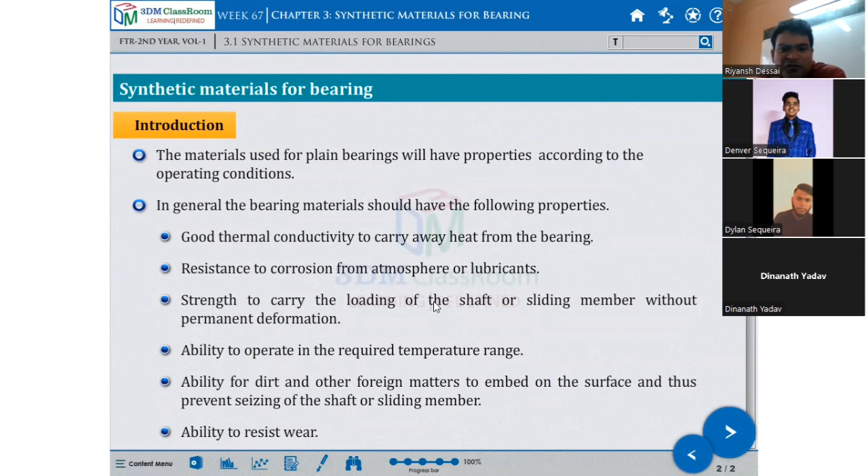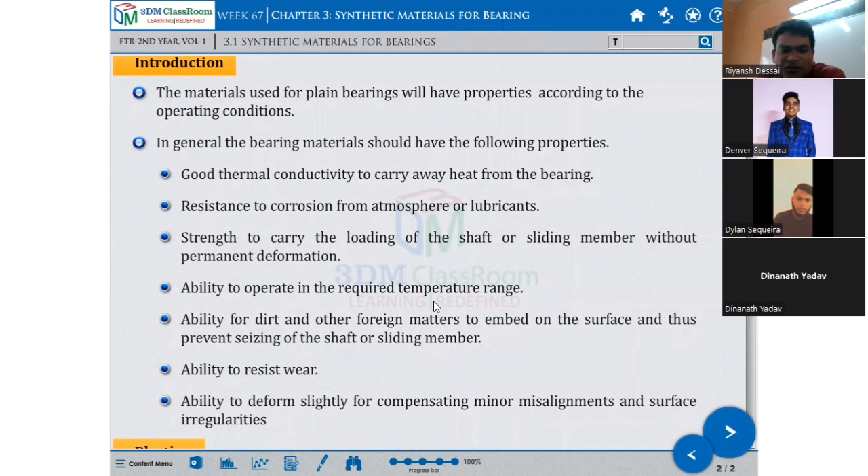Now synthetic material for bearing. Synthetic material for the bearing is mostly proposed according to the operating condition. The general bearing materials should have good thermal conductivity, resistance to corrosion, strength to carry loading, shaft and sliding members without permanent deformation, ability to operate at required temperature, ability for dirt and other foreign matters to embed on the surface and thus prevent seizing of the shaft or sliding member, ability to resist wear, and ability to deform slightly to compensate for minor misalignment of the surface.

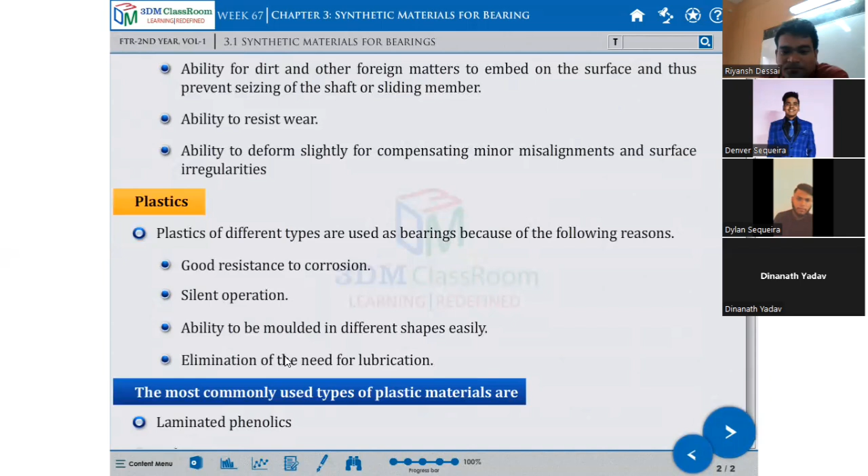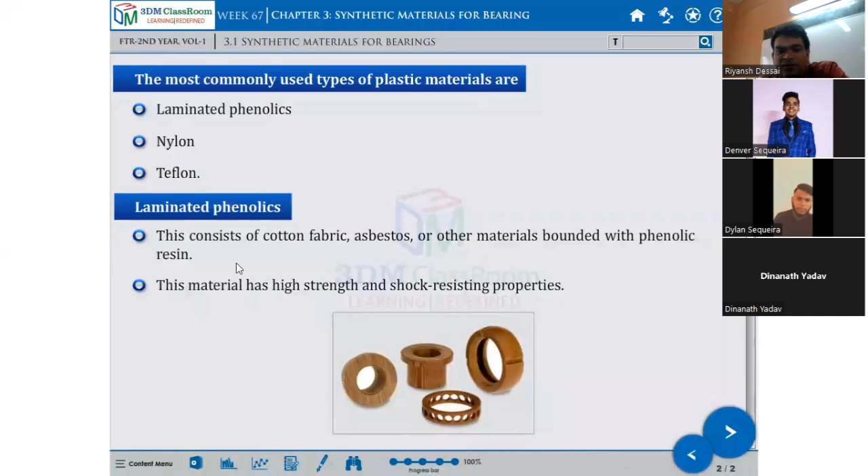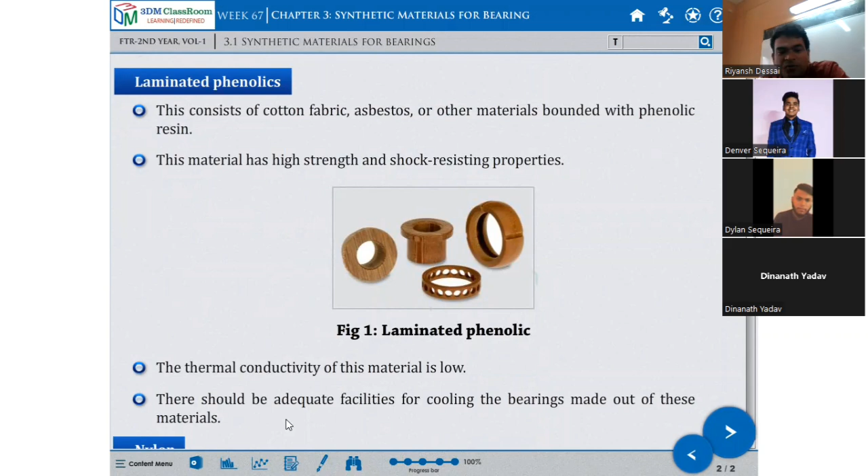Plastic. Plastic has good resistance to corrosion, silent operation, ability to mold it into different shapes, and elimination of the need for lubrication. The most commonly used types of plastic material are laminated phenolics, nylon, and Teflon. Laminated phenolics consist of cotton fabric, asbestos, or other material bonded with phenolic resin. This material has high strength and shock resistance property. Thermal conductivity of this material is low, so there should be an adequate facility for cooling the bearing made out of this metal.

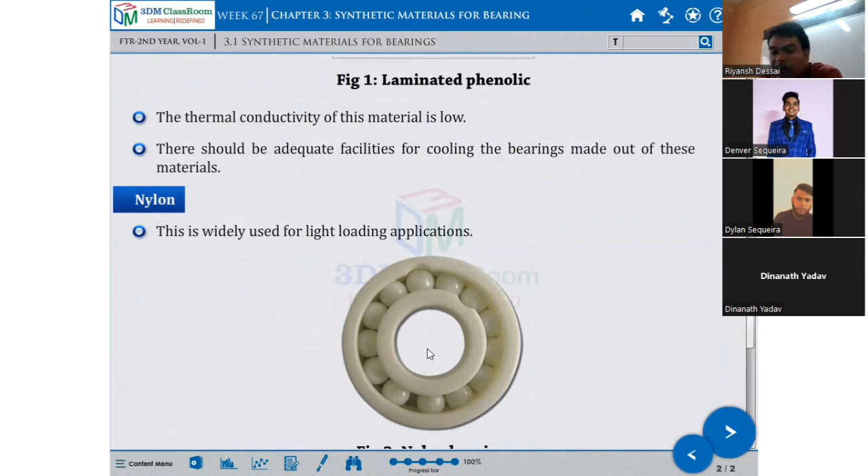Next metal is called nylon. This type of bearing is called nylon bearing. It is widely used for light load applications. Nylon bearings need no lubrication as they have their own self-lubricating property, so nylon bearings do not require any grease.

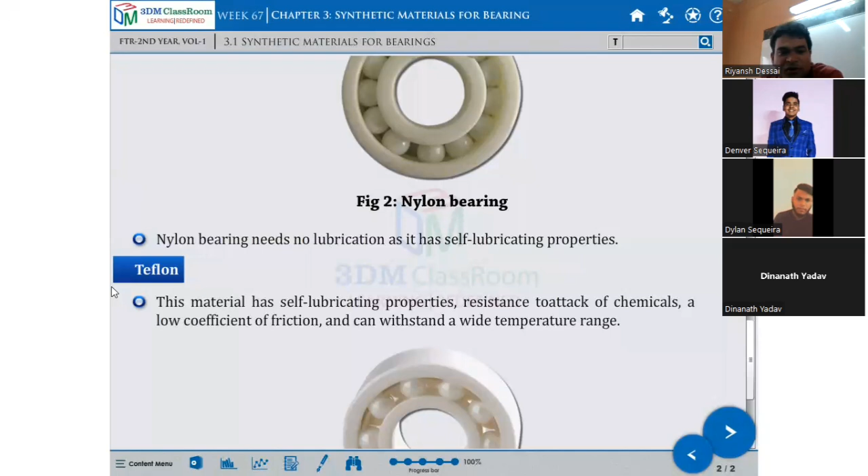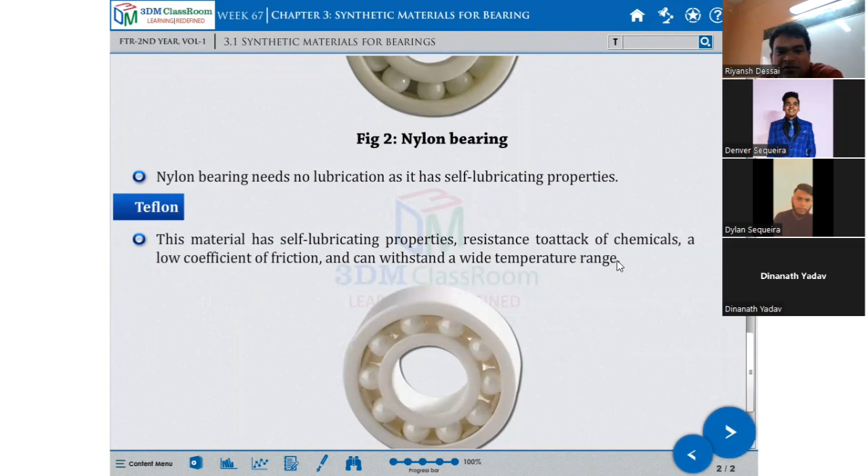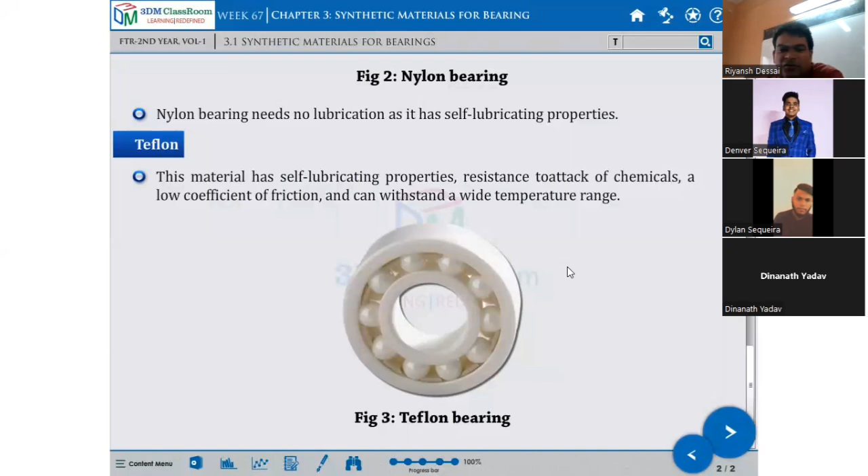Next metal is called Teflon. This is a very costly metal compared to stainless steel. This metal has self-lubricating properties, resistance to attack of chemicals, low coefficient of friction, and can withstand a wide temperature range. Teflon is fire resistant - if you apply it to fire, it will not catch fire. It resists any chemical attack, such as acid; nothing will happen to it, like the Teflon tape we use. Teflon bearings need no lubrication as they have self-lubricating properties.

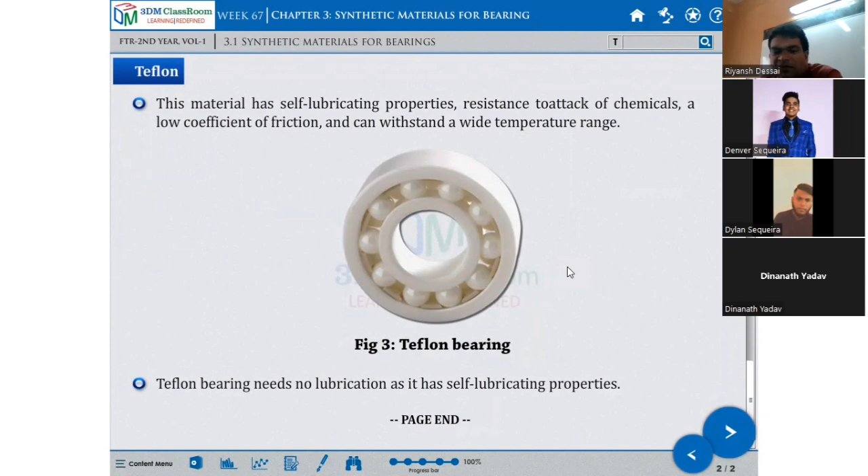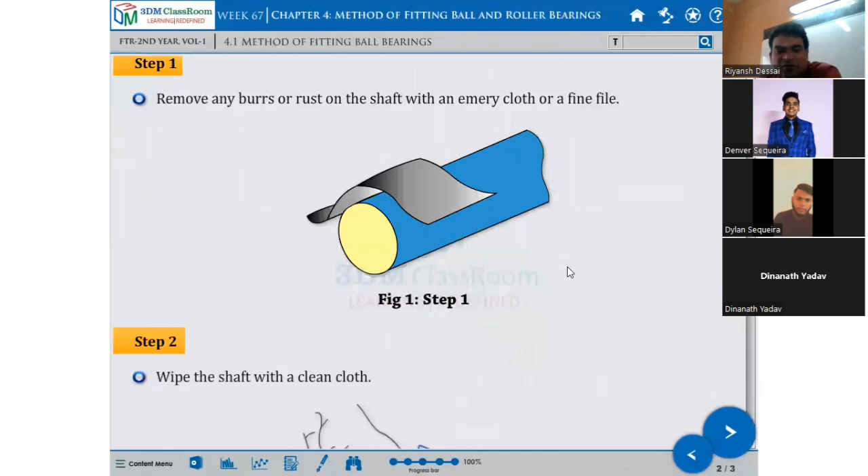Methods of fitting ball bearings - you should read this section yourself for practical purposes, to understand how to remove and how to fix it. There are some steps for how you can remove it. This is a practical matter, but you don't have to write down the full procedure. It is there in your book also for your knowledge, on how you can remove it.

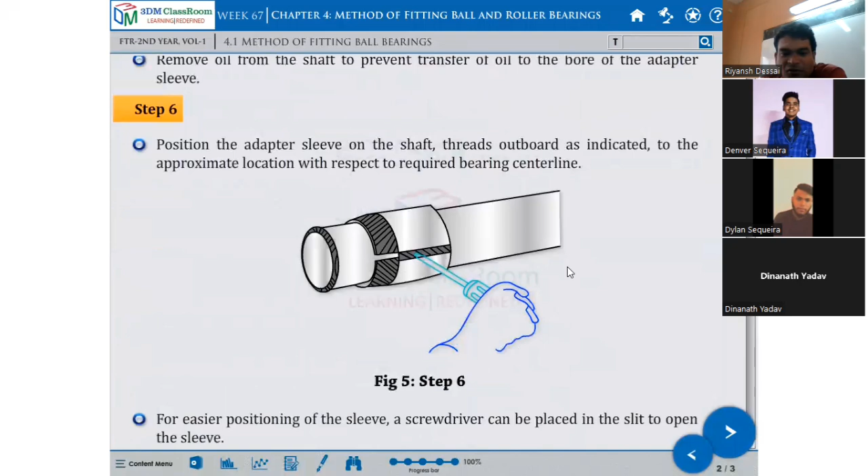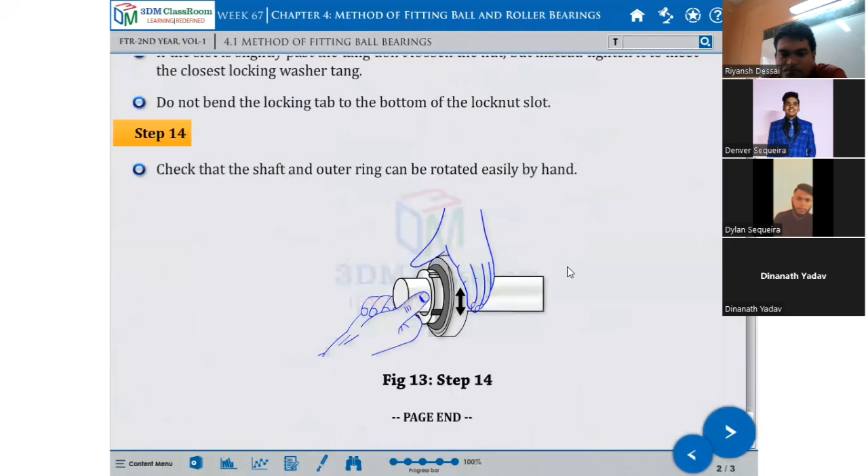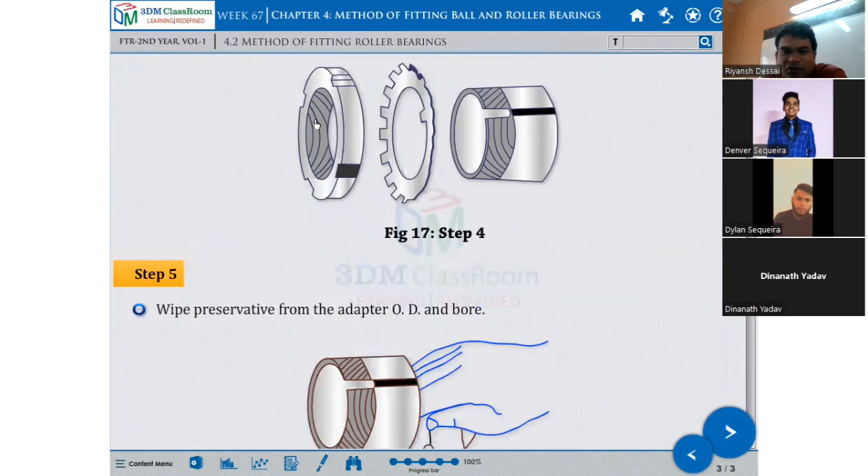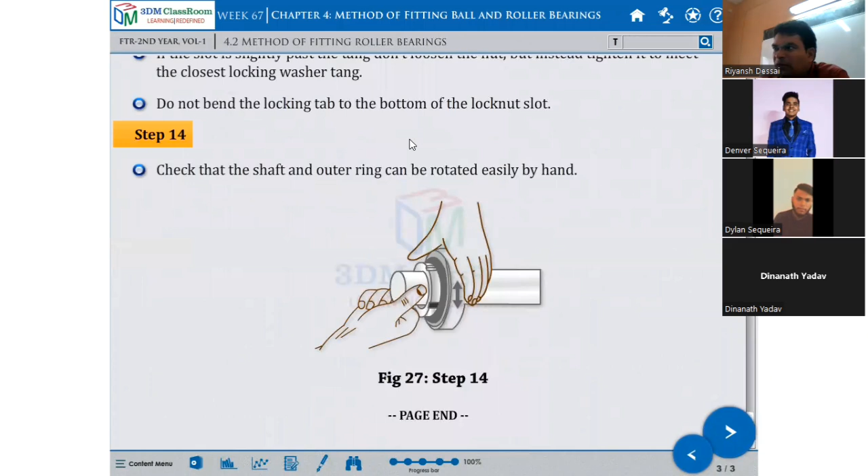Methods of fitting roller bearings. Suppose there is a roller bearing - same procedure, but with a sleeve and locknut involved, how to put this in place; everything is mentioned. Take both of these topics for practical purposes; we'll discuss the job plan and then do the practical.

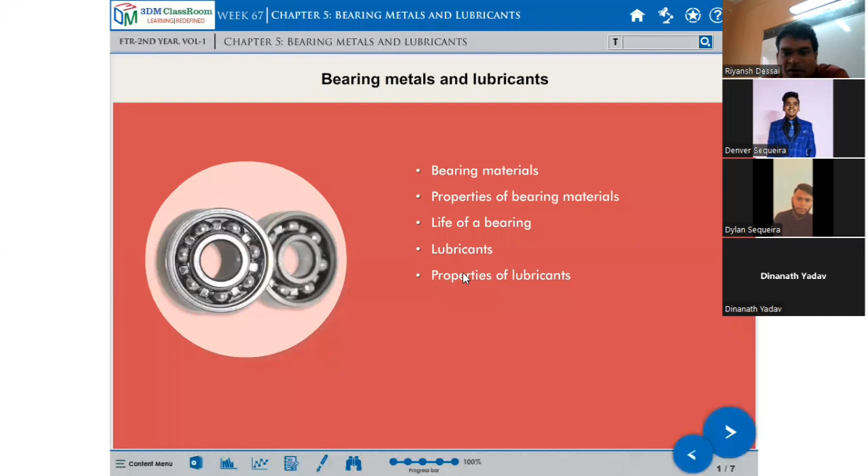Now, bearing metals and lubricants - we discussed this yesterday actually. So we have bearing metal, properties of bearing metal, useful life of bearing, lubricants, and properties of lubricant. This white metal column we already discussed. Bearing metals, for example, white metal.

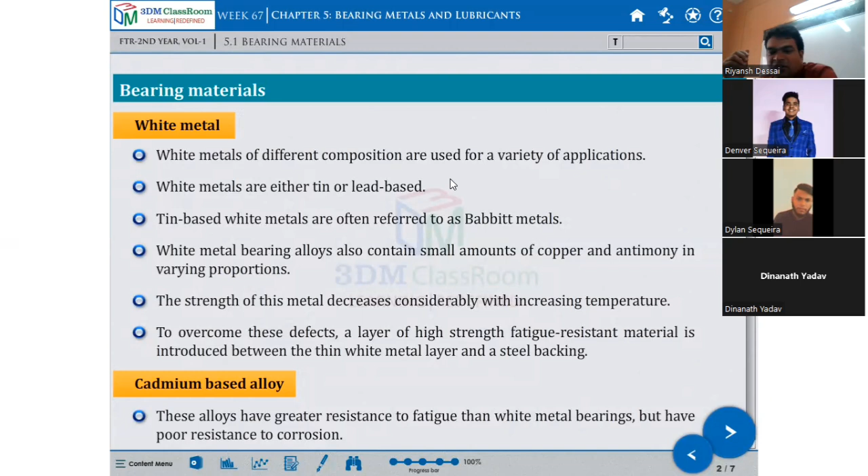White metal of different compositions is used for a variety of applications. White metals are either tin or lead based. Tin-based white metal is often referred to as Babbitt metal. White metal bearing alloys also contain small amounts of copper and antimony in the varying proportion. So Babbitt metal is basically tin based, while white metal basically contains a small amount of copper and antimony. The strength of this metal decreases considerably with increased temperature, and to overcome this defect, a layer of high strength fatigue-resistant material is introduced between the thin white metal layers and the steel backing.

Next is cadmium-based alloy - this was not covered yesterday. These alloys have greater resistance to fatigue compared with white metal bearings, but have poor resistance to corrosion. These alloys usually contain small amounts of nickel, copper, and silver. Bearings made out of these alloys can work at higher temperature and have higher load carrying capacity.

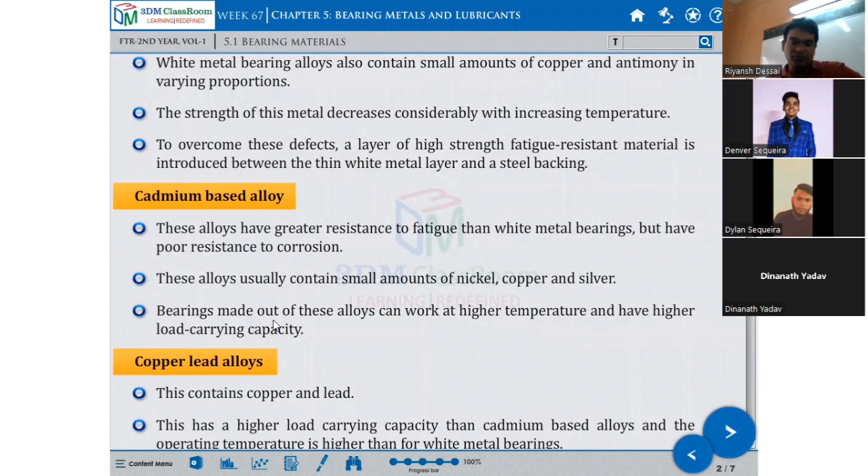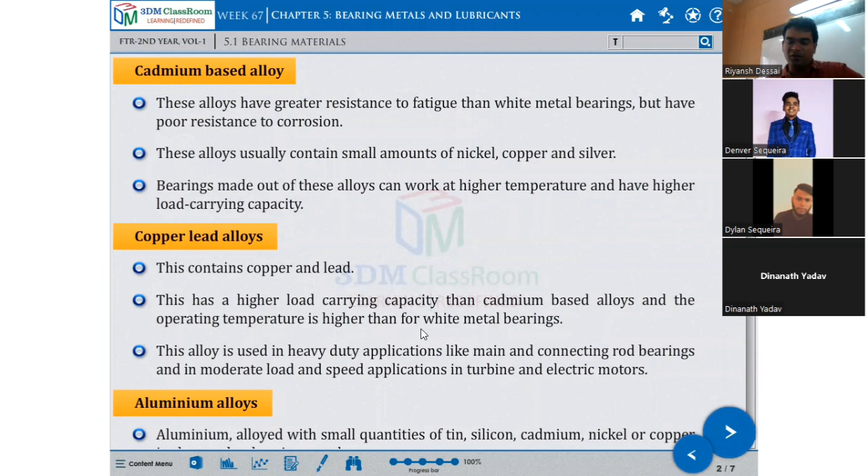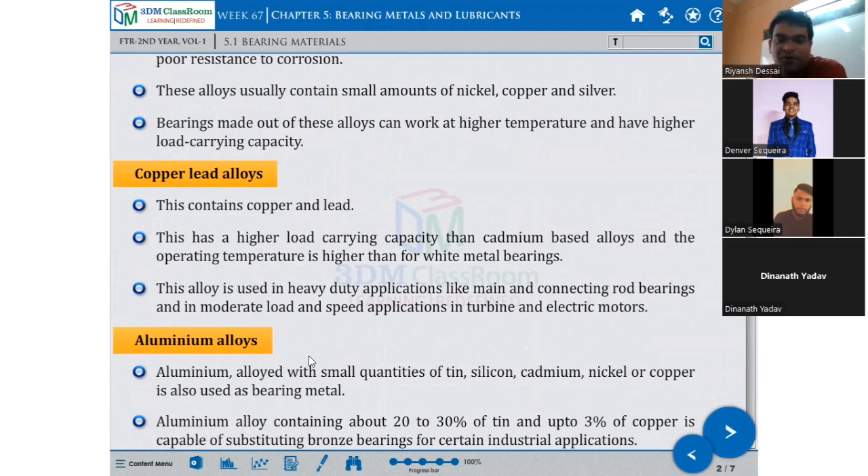Next, copper lead alloys. This contains copper and lead. These have higher load carrying capacity than cadmium based alloy, and the operating temperature is higher than white metal bearings. This alloy is used in heavy duty applications like main and connecting rod bearings, and in moderate load speed applications in turbines and electric motors.

Aluminum alloy may also be used as a bearing metal. Aluminum alloy with a small quantity of tin, silicon, cadmium, nickel, or copper is also used as a bearing metal. Aluminum alloys containing about 20 to 30% tin, and up to 3% copper, are capable of substituting bronze bearings for certain industrial applications. It is suited for hard journals.

It is necessary to give extra clearance between bearing and journal to overcome the effect of high thermal expansion. Aluminum alloys for bearings are available with special properties needed for high load carrying capacity, strength, and thermal conductivity. So these are the purposes of putting the alloy in theory. You can read it and keep it for your knowledge.

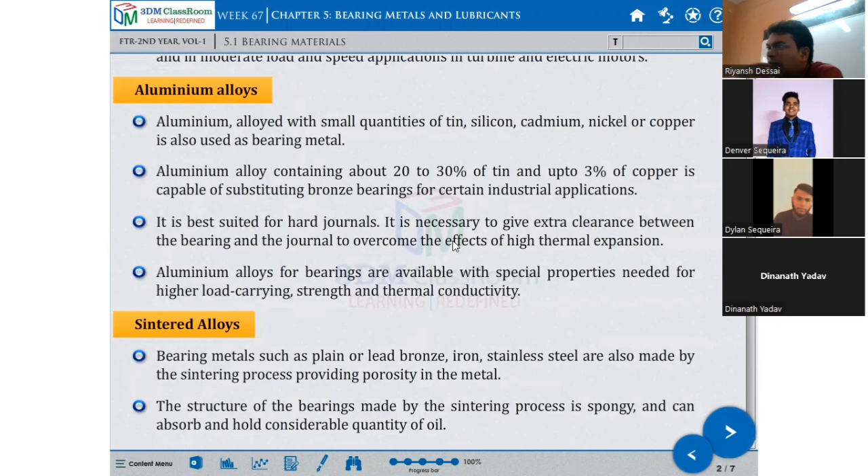Sinter alloy may also be used for bearing metals. Bearing metals such as plain or lead bronze, iron, steel, and stainless steel are also made through the sintering process, providing porosity in the metal.

So we can do sintering also. Sintering process means what? There are some different metals that get mixed. It's alloy and metal, then you have to mix that metal. Then you have to shape it into a compact form. It's a powder metal. You have to mix all that powder, then make a tablet, a compact tablet.

Similarly, the sintering process applies wherever you apply that powder, you have to make it properly and mix it with materials like lead; stainless steel is also made by sintering. Then that compact piece, after pressing the powder, we get a compact. That compact you have to put for the sintering process. Sintering means you have to give it heat treatment.

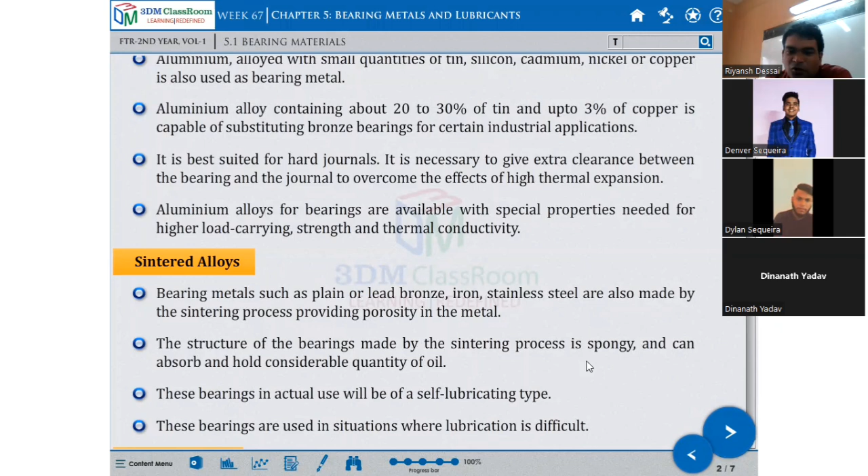So sintering alloys can also be used for bearing metals based on what type of property is required. The structure of bearings made by the sintering process is spongy and can absorb and hold a considerable quantity of oil. These bearings can actually be used as self-lubricating type.

These bearings are used in situations where lubrication is difficult. This type of sintered bearing you can use where you cannot do lubrication as per the required schedule. It's very difficult to put the lubricant; then you can go for this type of sinter alloy bearing metal, and you can use it as a bearing. It will take care of the lubrication.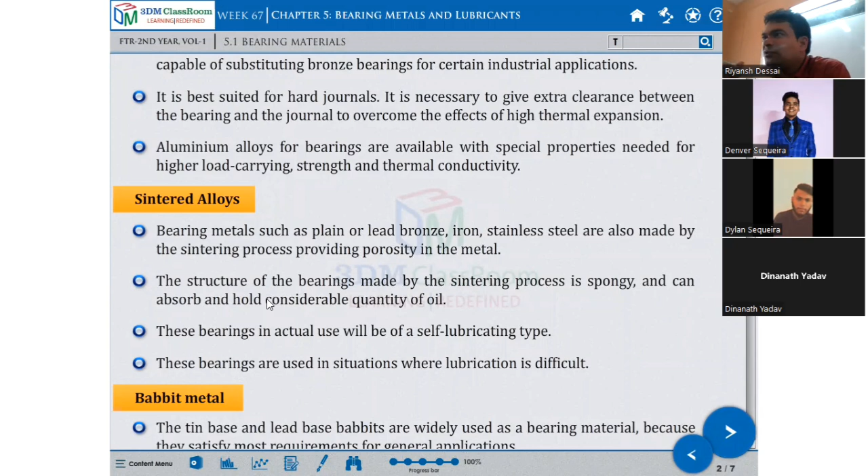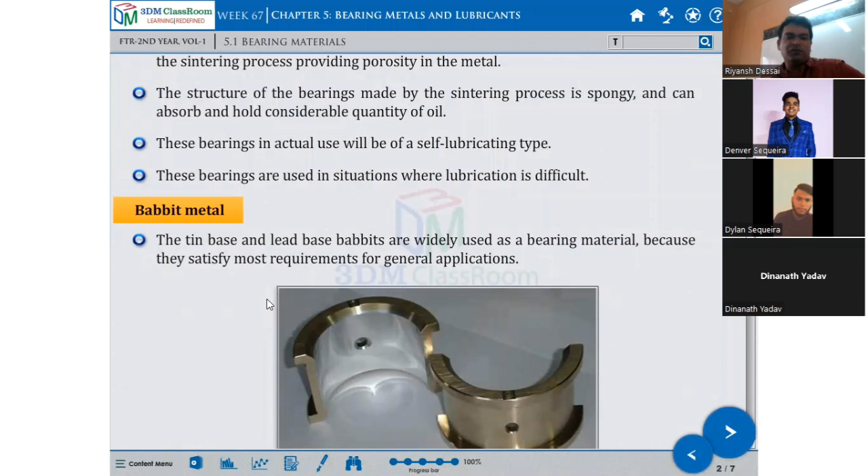Everything will be there. Babbitt metal, the tin base and lead base Babbitt, are widely used as bearing metals because they satisfy the most requirements for general applications. So this is a bearing actually, right? Tin base or lead base.

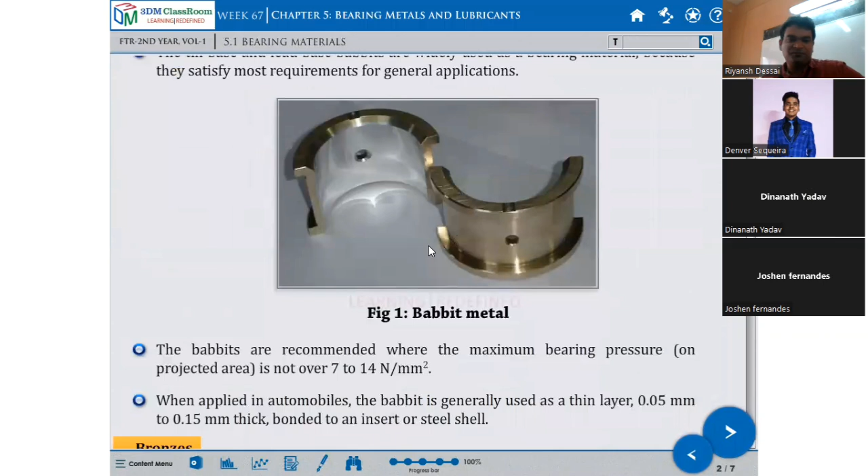The Babbitts are recommended where the maximum bearing pressure on the projected area is not over 7 to 14 Newton per mm square. When applied in automobiles, the Babbitt is generally used as a thin layer, 0.05 mm to 0.15 mm thick, bonded to an insert or steel shell.

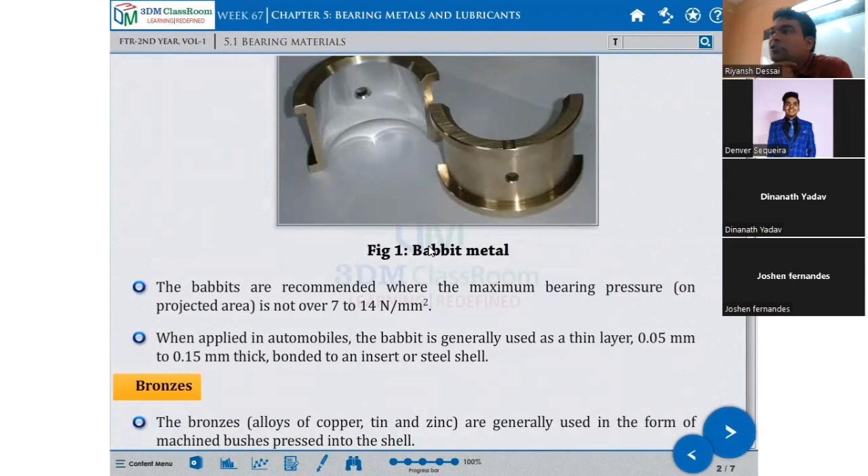That's why I'm taking this class on this. Here, if you see the picture, at least you can keep it in mind this way. This bronze alloy of copper, tin and zinc is generally used in the form of machine bushes pressed into the shell.

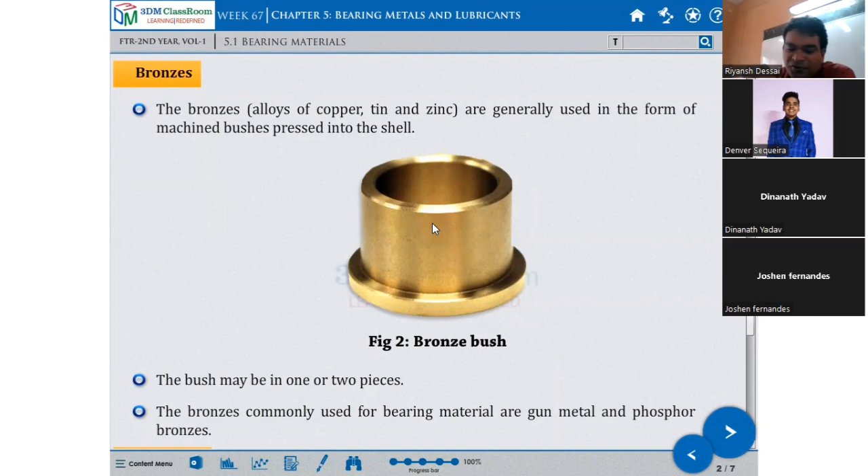Bush. The bush may be one or two-piece. The bronzes commonly used for bearing metals are gunmetal and phosphor bronze.

If you remember bush bearings, take the best example of a kitchen item, the mixer grinder. The mixer has a jar fitted into the mixer body, and that is connected below. Inside that cutter, there is a shaft or rod aspect, and that shaft is supported with this type of bush. That bush is actually acting as a bearing there, rotating inside. This type of bush in a mixer jar repair is actually a bearing over there.

The bronze commonly used for bearing metal is gun metal. So mostly gun metal and phosphor bronze.

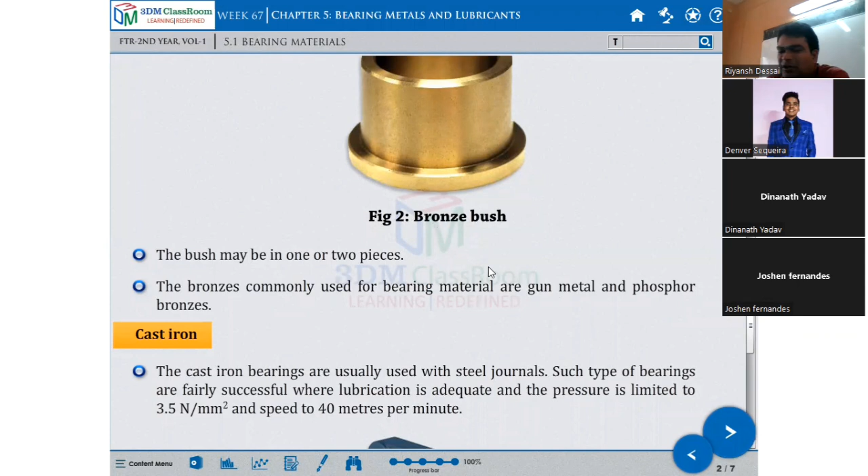You may get confused about how many types of bronze there are, but they are all made of bronze only: phosphorus bronze or gun metal bronze. Gun metal is made of copper, tin and zinc, all three coming together. Phosphorus bronze has some phosphorus type element in it.

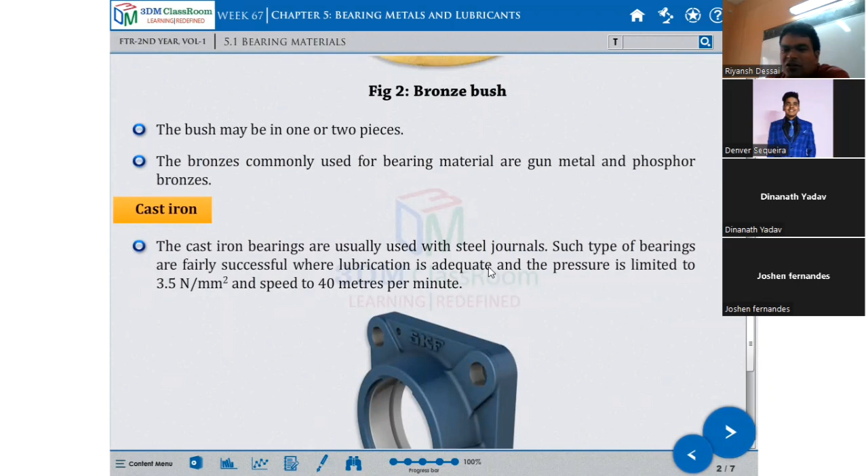Cast iron. Cast iron bearings are usually used with a steel journal. Such type of bearings are fairly successful where lubrication is adequate and the pressure is limited to 3.5 Newton per mm square and speed 40 meters per minute. So this is a cast iron bearing block; directly you can use it as a bearing because cast iron itself is a bearing metal.

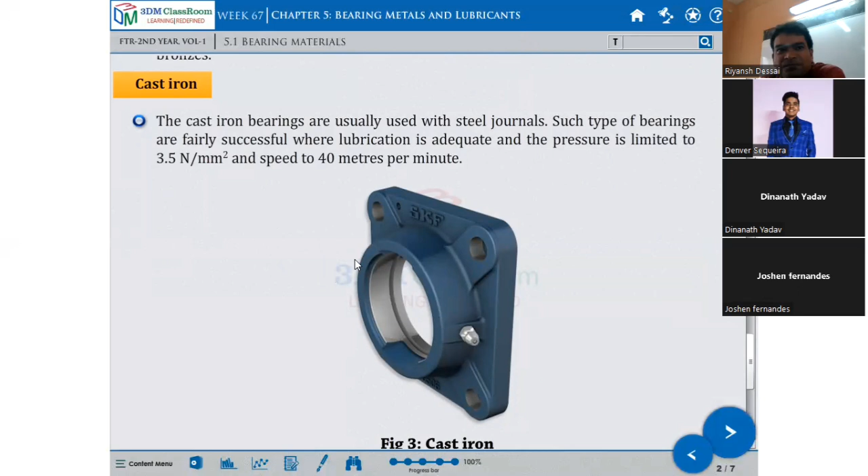When you fit the shaft, it will rotate inside. For lubrication, a grease point is given here; here you have to do the greasing. The shaft will rotate here inside. This is the bearing lining actually. Then you can replace this full block of cast iron.

Then silver is also sometimes used as a bearing metal. Silver and silver lead bearings are mostly used in aircraft engines where fatigue strength is the most important consideration. If a lot of fatigue forces are continuously acting on the bearing, mostly in the aircraft industry because it's flying, there is air pressure, so you have to use silver metal for the bearing. It's very costly.

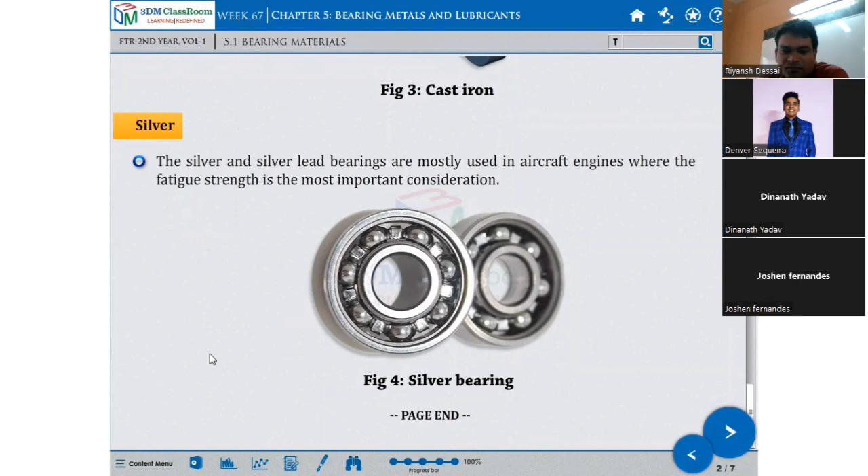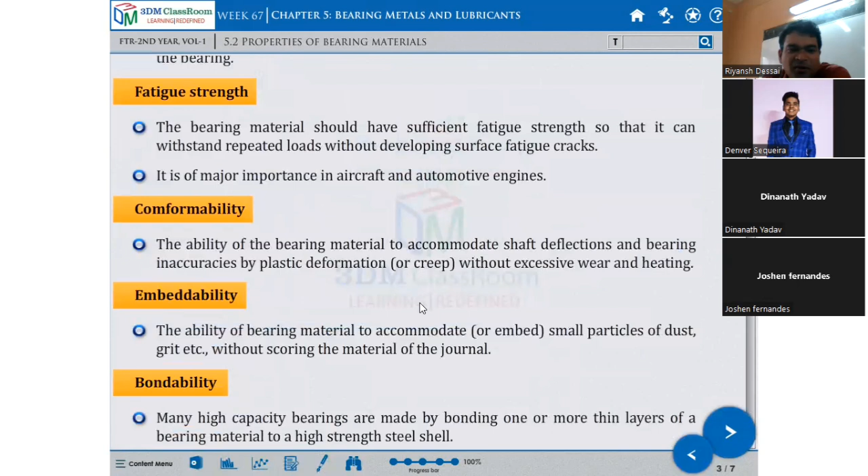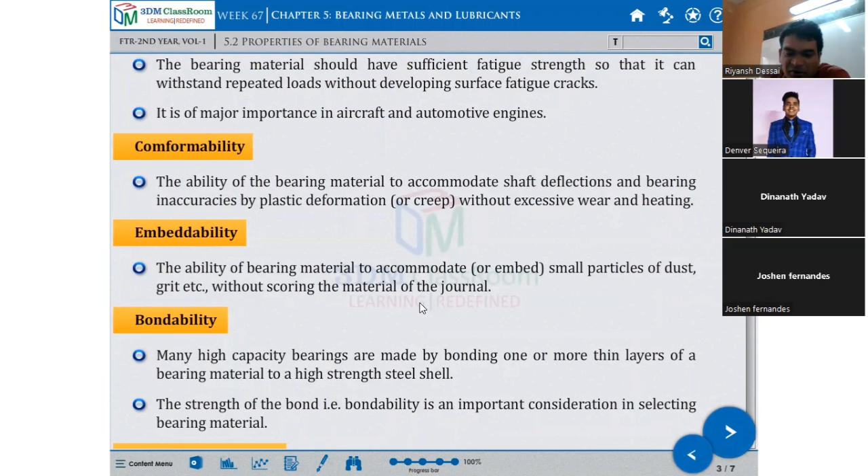The properties of bearing metal, I already discussed: compressive strength, fatigue strength, conformability, embeddability, bondability. Many high capacity bearings are made by bonding one or more thin layers of bearing metals to a high strength steel shell. So the bondability is an important consideration in selecting the bearing metal. Corrosion resistance, we already discussed. Thermal conductivity also discussed.

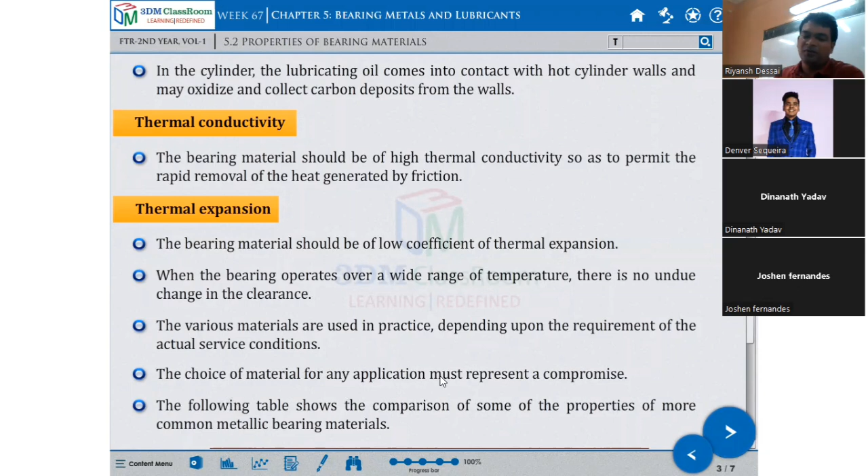Thermal expansion: bearing metals should have a low coefficient of thermal expansion, so when the bearing operates over a wide range of temperature, there is no undue change in clearance. Various metals are used in practice depending upon the actual service condition. The choice of metal for any application must represent compromises. The table shows a comparison of some properties of the more common metallic bearing metals. You can take it for reference purposes.

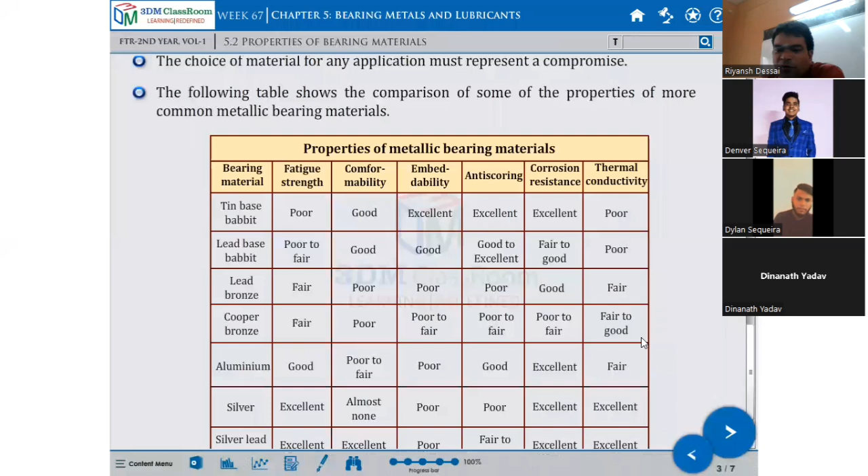Copper bronze: fatigue strength fair, conformability poor, embeddability poor to fair, anti-scoring poor to fair, corrosion resistance fair to good, thermal conductivity fair to good. Aluminium: fatigue good, conformability poor, embeddability poor, anti-scoring good, corrosion resistance excellent, and thermal conductivity fair.

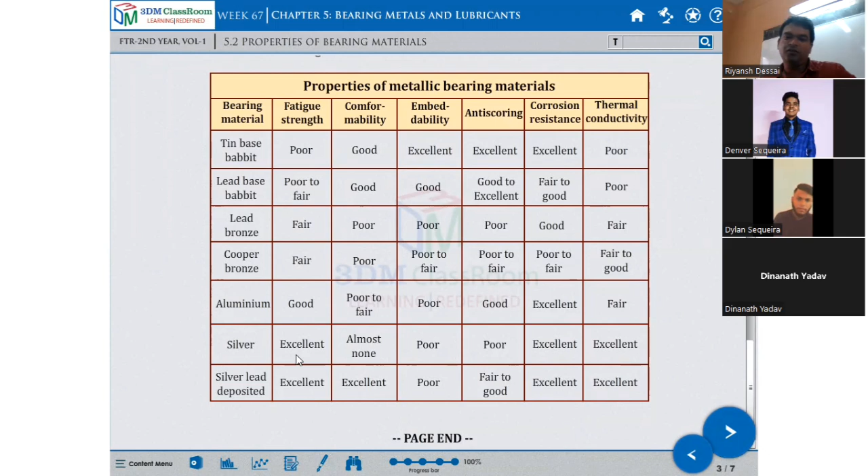Silver always has excellent fatigue strength. Only silver is excellent in the fatigue condition; that's why the aircraft industry mostly uses silver for the bearing metal. Conformability almost none, embeddability poor, anti-scoring poor, but corrosion resistance excellent and thermal conductivity also excellent. Silver lead deposit is excellent for fatigue strength again, conformability excellent, embeddability poor, anti-scoring fair to good, corrosion resistance excellent, and excellent thermal conductivity.

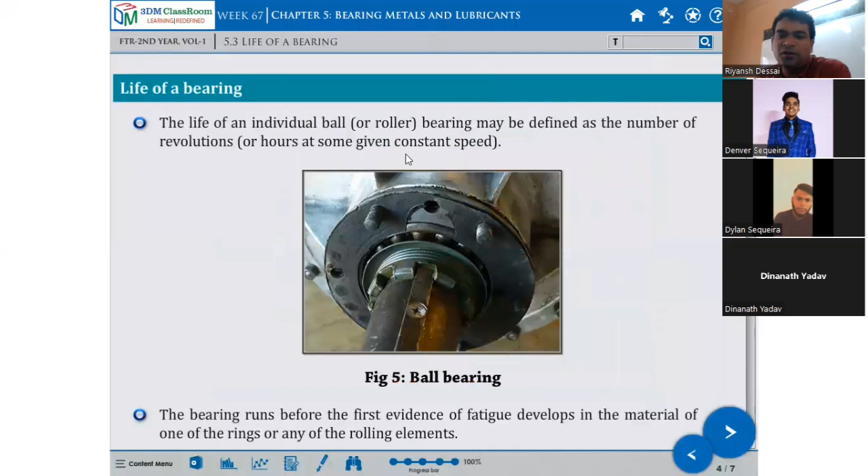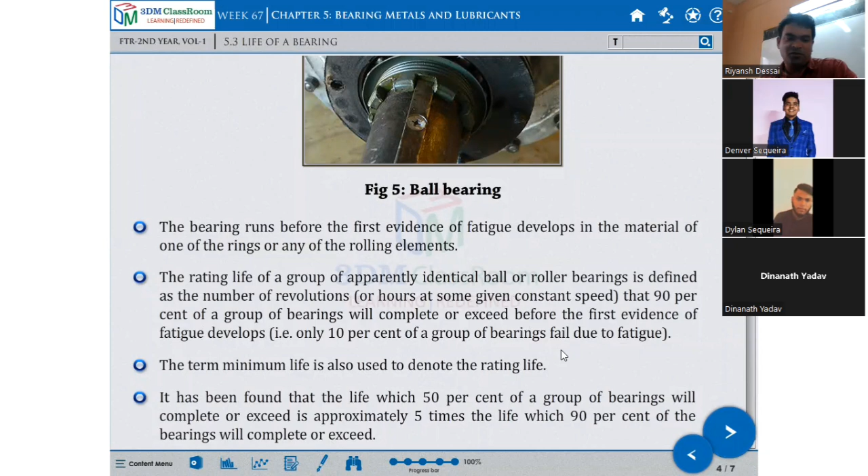Life of the bearing. Life of an individual ball bearing may be defined as the number of revolutions or hours at some given constant speed. After some rotation, the bearing develops wear and tear or starts giving a problem, sound, and then we need to replace it. The rating life of a group of apparently identical ball or roller bearings is defined as the number of revolutions or hours at some given constant speed that 90% of the group will complete or exceed before the first evidence of fatigue failure. The term minimum life is also used to denote the rating life.

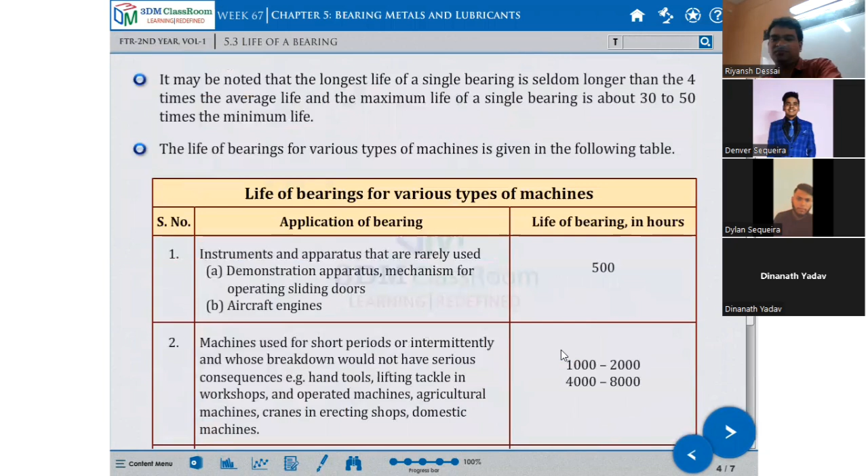Life of the bearing for various types of machine: application of bearing and life of bearing in hours. You can refer to it. Machines working 24 hours, such as separators, compressors, pumps, mine hoists, naval vessels, will run 40,000 to 60,000 hours.